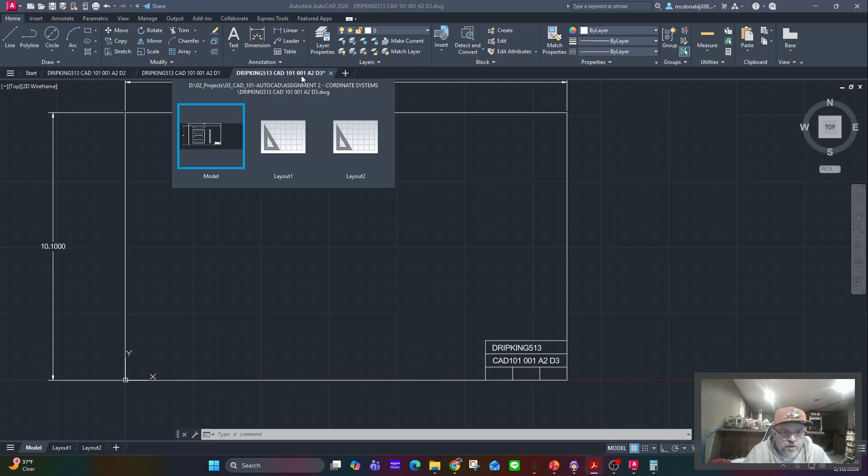I've got our file up for drawing number 3 here. I went ahead and saved it. You can see up here in the tab for the file, got the proper name, my name, CAD 101, Section 1, Assignment 2, Drawing 3. I've already updated my title block to show Drawing 3 at the end. So this here is the drawing we're about to do.

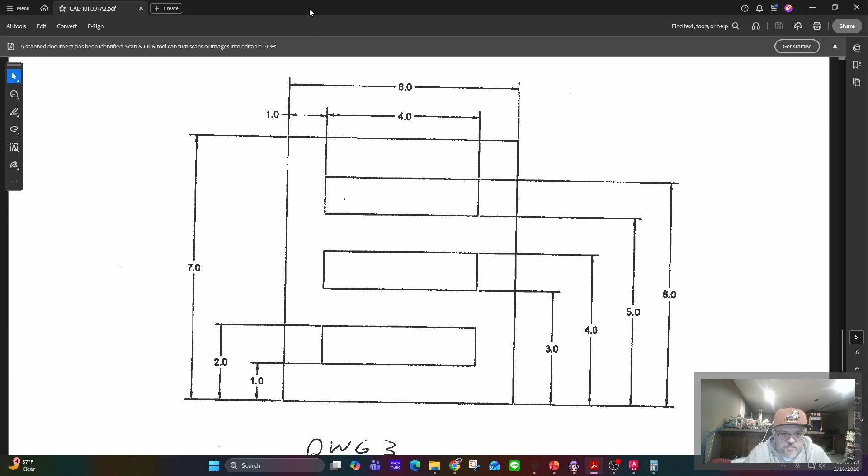It is a 7-inch tall by 6-inch wide block, and we basically have these rectangular cutouts stepping up every inch. So 1 inch, 2 inch, 3 inch, 4 inch, 5 inch, 6 inch, all the way up, 1 inch from each side. Looking at this, you can probably recognize this is essentially an offset and trim exercise.

We're going to start by making our overall rectangular shape for what we'll end up machining or sending to the machine shop. For our absolute reference point, I've clicked on line, specify first point. We're going to start this at 1, 1 this time. Our piece is 7 inches vertically, so 7 tab.

Want to make sure that's at a 90 degree. Hit enter. Come over, it is 6 inches, and again we're at 0. So 6, 0, both are locked in. Hit enter. We are 7 inches straight down. That should be, let's try 180. Nope, let's do 90. There we go.

And then close our shape off. 6 inches, 180 degrees. We are good.

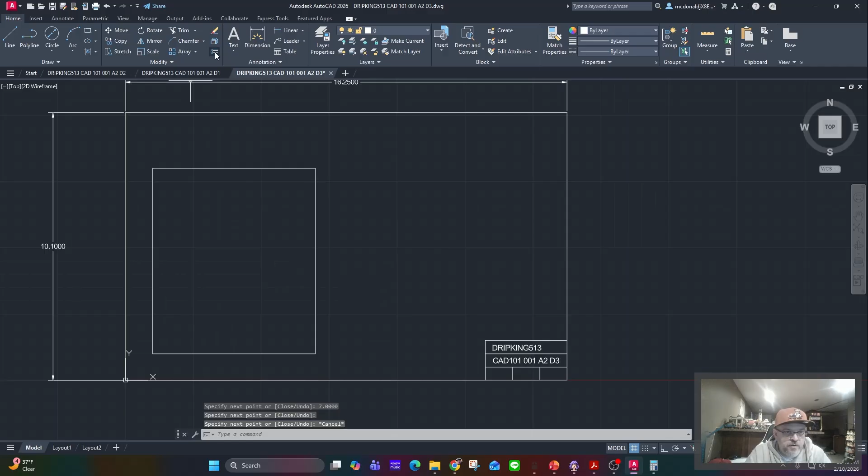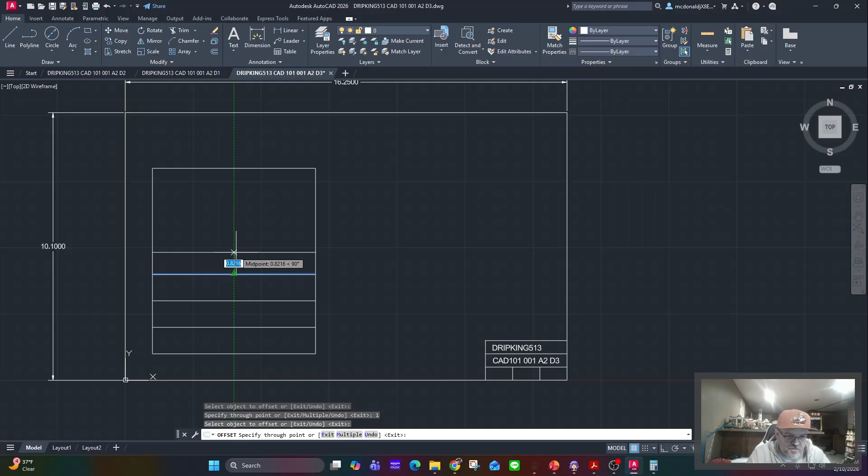Now we're going to offset to start making those rectangular cutouts in the middle. We're going to click on the bottom, go 1 inch up. 1, enter. Click on that new line, 1, enter. All the way up a couple times, for a total of 6 times. That's 4, that's 5, that's 6.

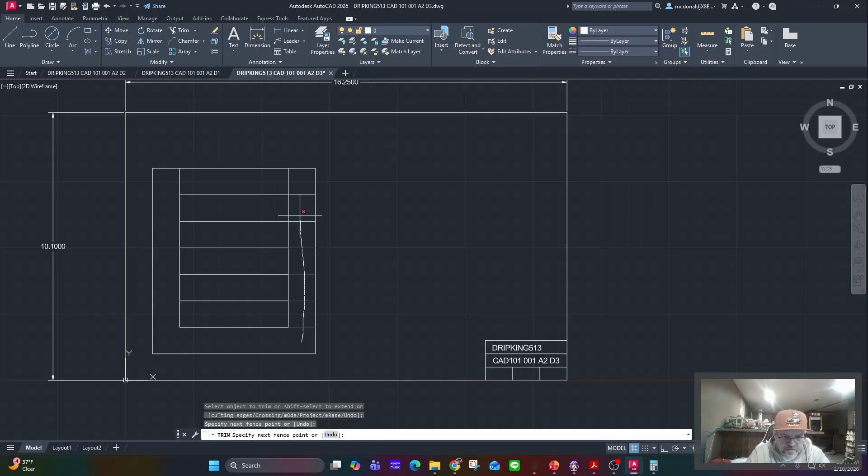Now we're going to come in from each side 1 inch, and from this side 1 inch. Go ahead and hit our trim tool. We don't need any of these lines on the edge, the lines on the bottom, the lines on this edge. Here we want to leave this rectangle, so we do the lines in between, leave this rectangle, and there we go. That is our front view.

Now we're going to extend, going straight up. So extend, we want our edges. We're going to do these lines for the edge of our rectangular cutouts. We're good there. Now we're going to offset through the top of our front face.

We're going to want to come right in here. So if the top's at 1.5 inches, we'll just do like 1 here. Offset again, straight up, 0.5, that's the thickness of our board. And then we're going to again trim to clean this up, so get rid of the lines in between and the lines up above. There you go, there's our top view.

Oh, we also need to trim those lines from when we extended. Since I hit escape, I was out of that function. There we go.

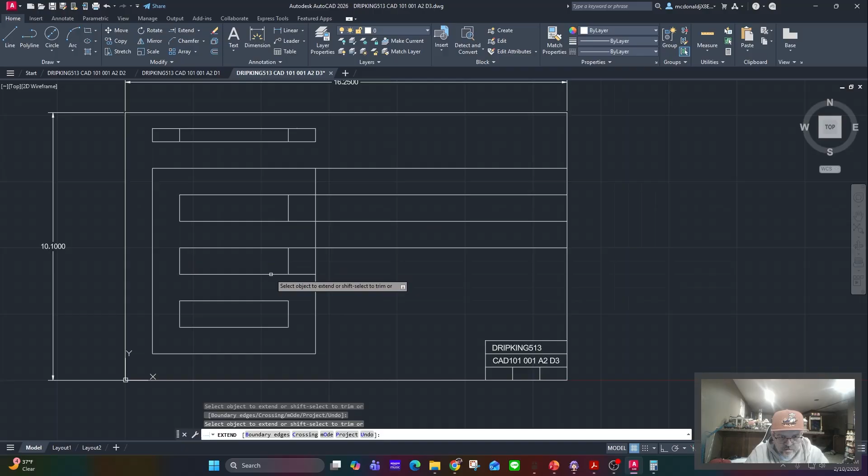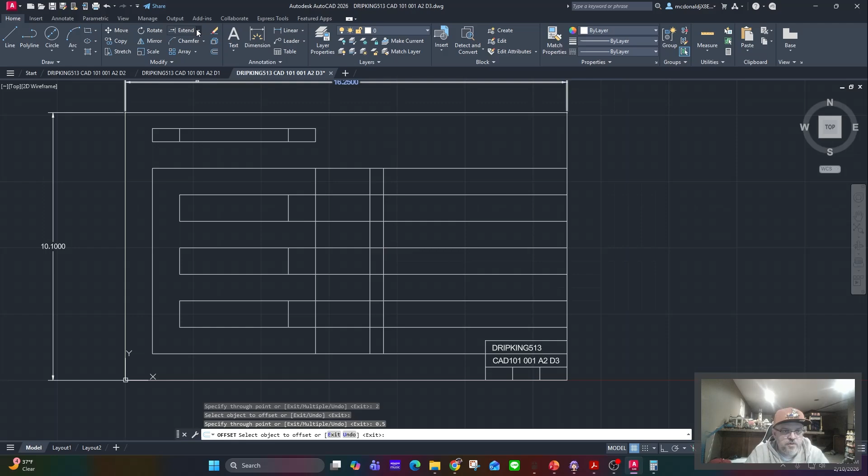Now we're going to extend the other direction to get our right side view. Escape a couple times. We're going to offset through from our edge. Come over here, let's do it 2 inches. Offset one more time, 1/2 inch. And then we will go to trim. Clean up all the lines in between the two, all the lines to the right of our side view, those extra lines that got put in when we did extend. Escape out, and there we go, there's our side view.

So our top view, everything is lined up. Our side view, we got our top of the whole shape, top of that pocket, bottom of the pocket, top of the next, bottom, top, bottom, bottom of the whole shape. There we go, that is drawing number 3.

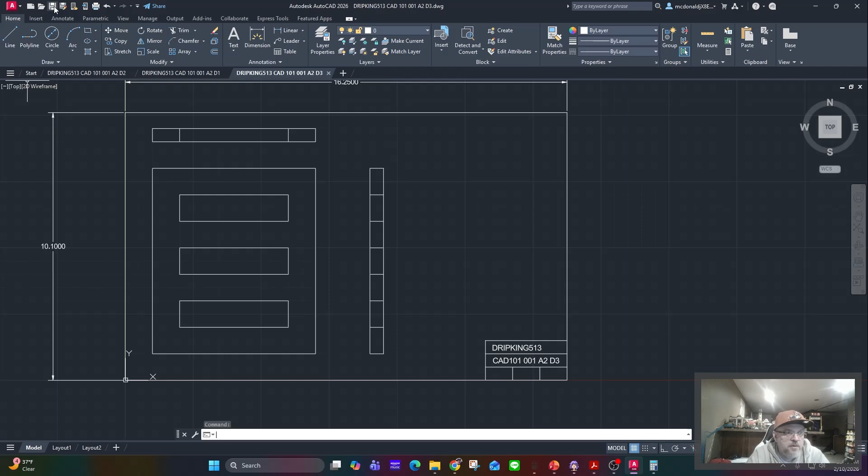Going to hit save, and then at that point we can export and start working on sketch number 4.